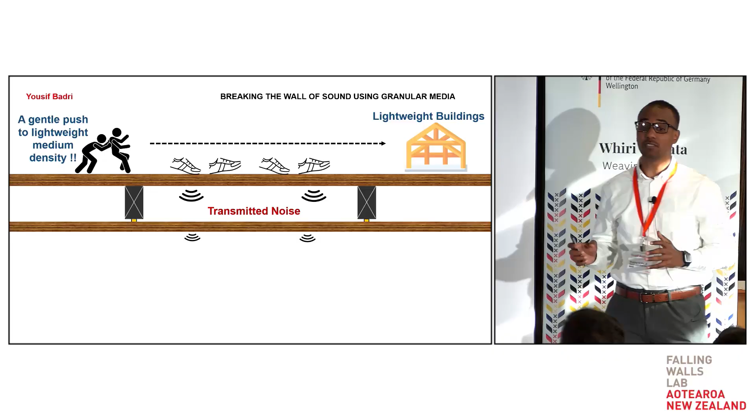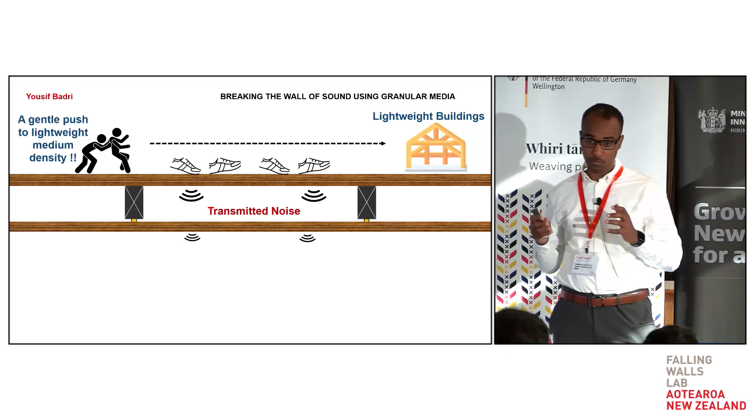Humanity needs more than 90,000 new homes every single day. This pressure is pushing cities to build faster, denser, lighter. Lightweight buildings do not mean unsafe or that the walls will fall down, but they do mean sound waves can travel more easily. And if you have a noisy neighbor, you might wish these walls would fall down just so you could ask them to keep quiet.

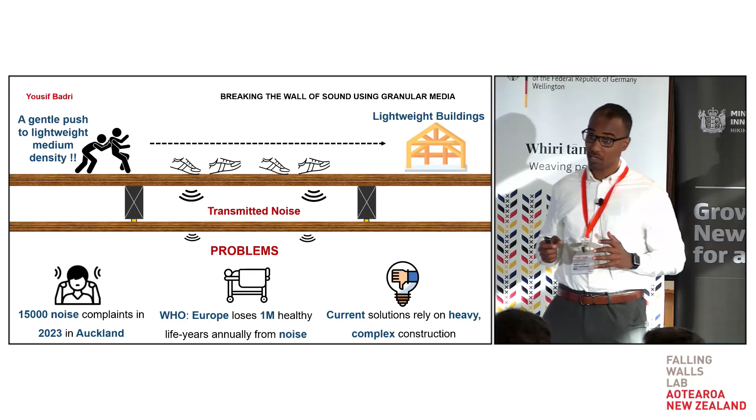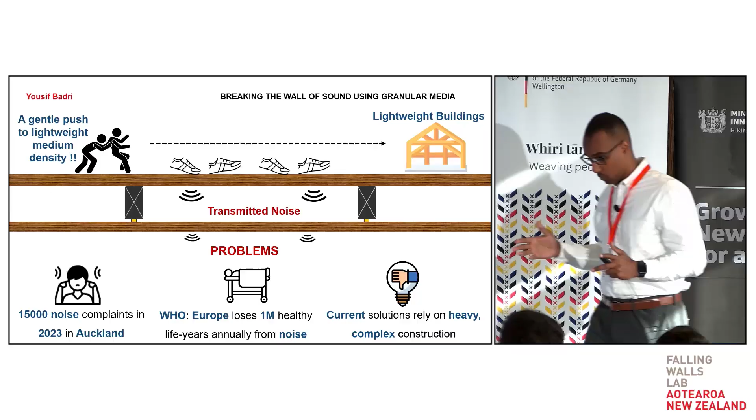It sounds like a joke, but it's not for the 15,000 Aucklanders complaining about noise each year, and not for people in Europe who are facing the stress, cardiovascular disease, and early death strongly linked to long-term noise exposure. So how do we make our homes quieter? The traditional answer is to fill empty wall and floor cavities with mass. As the saying goes, empty vessels make the most noise.

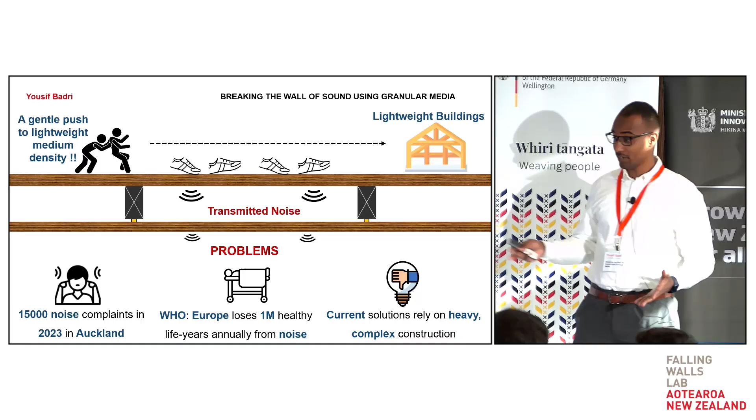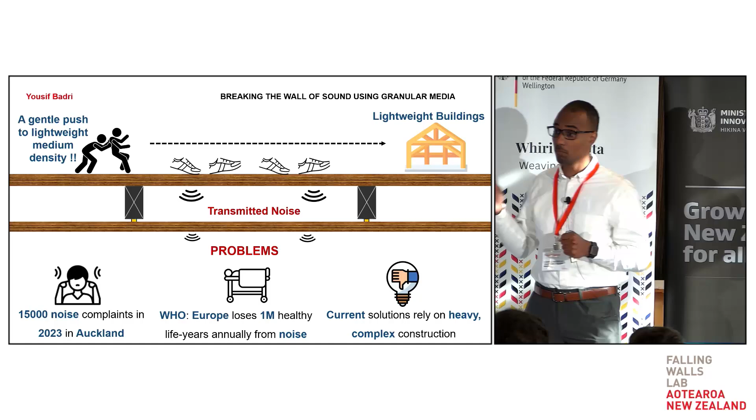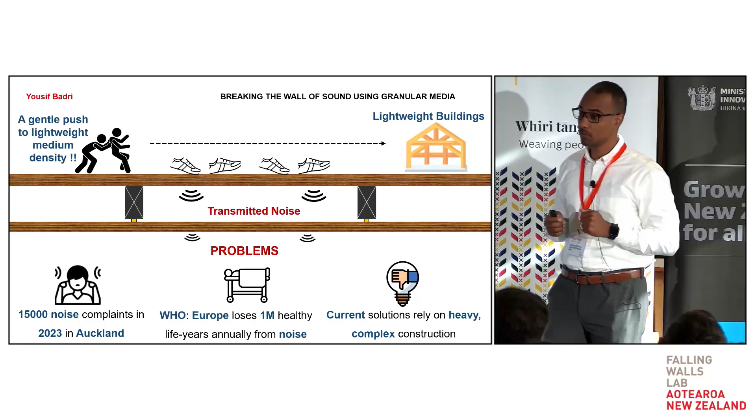Another common answer is to use resilient layers or mats, but one makes the building heavier, and the other makes the construction complicated and costly. And that's the wall I want to break. Sound insulation should not have to mean heavier building or complicated construction. My approach is to use granular media hidden inside wall and floor cavities to make sound waves lose energy using damping and sound absorption. Imagine being a particle packed in a floor cavity, like people in a crowded train.

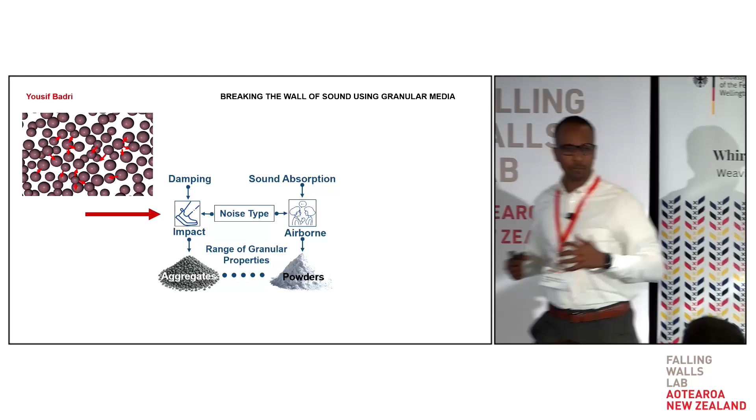When the floor shakes, you bump into your neighbor, reducing impact vibration from footsteps through what we call damping. When the sound wave passes through the tiny gaps between these particles, these gaps act like a porous sponge, slowing the speed of sound and absorbing airborne sound like speech through what we call sound absorption.

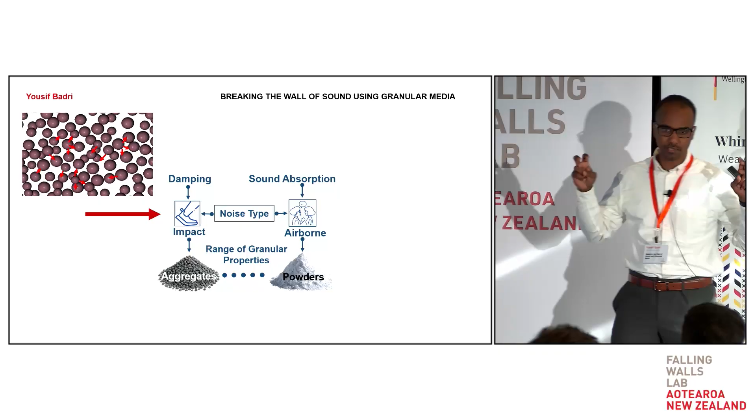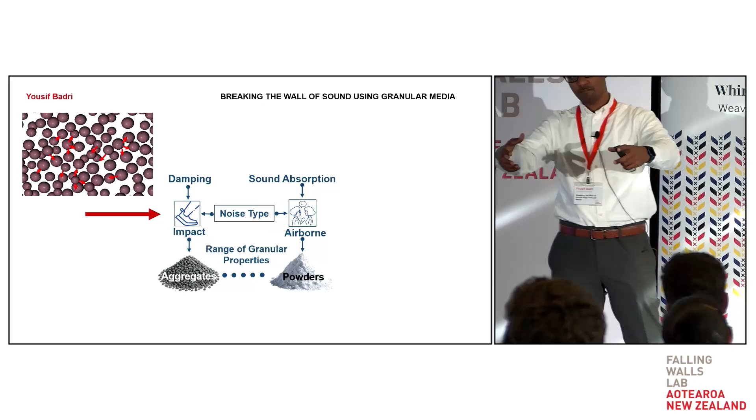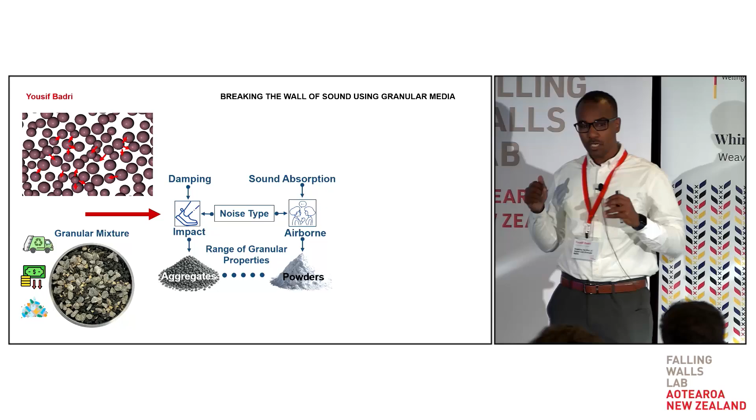We did not study perfect engineered spheres. We studied particles, a range of them that people know, from pavement aggregate to fine powders. And we characterized how their mass, density, size, and stiffness control damping and sound absorption. Using this knowledge, we developed a heterogeneous granular media made from low value and waste materials. A new sound insulation system, but also cheap, lightweight, and effective.

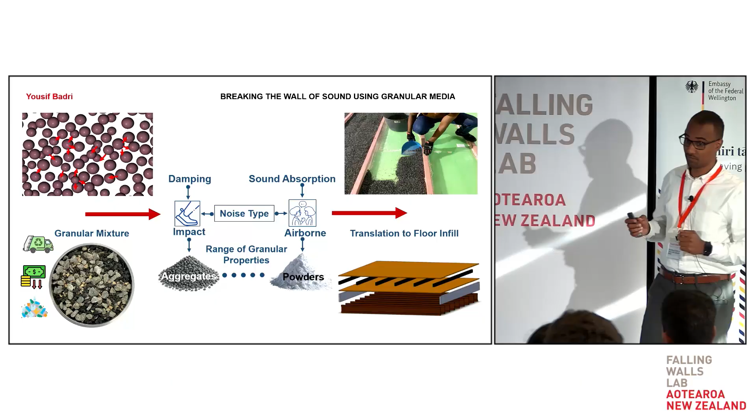When tested as a lightweight floor infill, it reduced sound transmission by more than 6 dB, beyond what added mass alone can explain. And 6 dB means more than half of the sound energy was technically gone. We showed through this research that the physics of small particles can create larger, quieter homes. Homes that do more than shelter people. They let them sleep, think, and live in peace. Thank you.

Questions for Yousif? Thank you, Yousif. Have you looked at how this affects the thermal properties of the wall? I guess these are cavities that are usually filled with thermal insulation, or are these cavities that exist in the buildings? Yeah, well, that's a very good question. Basically, these cavities are filled with acoustic insulation, like a fibrous infill. So they are not filled with thermal insulation.

And the reason why we're doing this is because this porous media that is being used now is only effective for very high frequency sound, like people speaking. So the impact noise is still there. So what we do, after validating and doing the experiment, we fill the cavities with a heterogeneous granular media, and then compare the results against simpler solutions like mats and fibrous infill. So we're trying to say that we don't need fibrous infill anymore. We just use granular media instead. And we don't need mats and resilient layers.